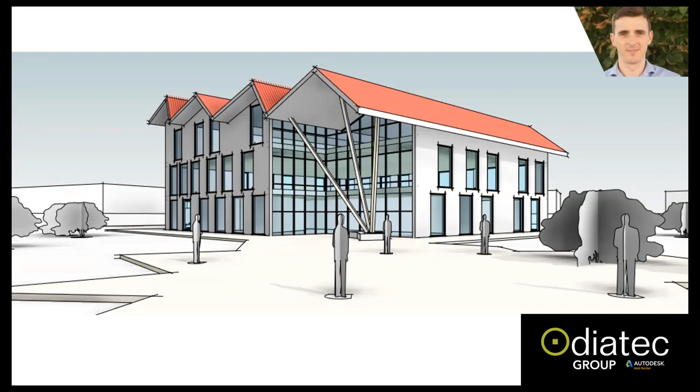But I do like to think that the benefits of using Revit perhaps alongside your AutoCAD workflow or in replacement of your AutoCAD workflow are far more beneficial, purely because you can pull things like conceptual 3D views like we're looking at here, as well as producing your 2D drawings. And I'm going to show you how to produce something like that in this webinar today.

So there are also other pieces of software such as FormIt Pro, which I will cover. That's another architectural software produced by Autodesk, and it's kind of a mass modeling, conceptual modeling design tool that you're able to use alongside Revit as well. So I'll show you some of the benefits of working in that as well.

So just a bit of an agenda. I'm going to cover some of the Revit 2022 latest updates from the product. I'm going to do an introduction to FormIt Pro and an overview, and then I'm going to show you the workflow from FormIt Pro into Revit, and then for producing your first design model or first set of drawings within Revit as well. I'll show you how to get started. This should take just under an hour.

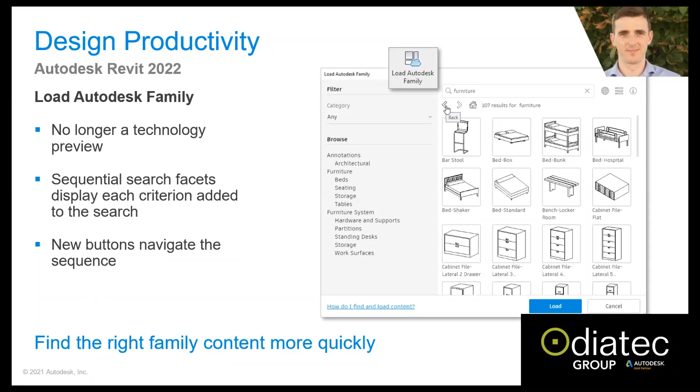So just some of the updates in Revit 2022, just some of the libraries that you're able to load in, and this is relevant even if you haven't used Revit. They've improved the user interface of being able to import what are known as family objects, and these are your 3D objects such as windows, doors, furniture. Anything like that is now accessible through a more user-friendly interface where you can just load it in quite easily within your Revit environment. So they've improved that. You're able to do native 2D PDF export.

So that was very much welcomed to this edition, whereas you didn't have that previously, but you're able to do it a lot easier now. And I know in AutoCAD we've been able to do that for quite a long time. So quite a welcomed update there.

Other workflows such as 3D sketching and sending to Revit with FormIt Pro. I'm going to show you similar workflows to that today from working in FormIt and getting your information into Revit and sending your FormIt geometry into Revit, and you're able to preserve things like your materials and your layers.

And I suppose the benefit of that is that you're producing that 3D model initially, and then you don't need to make any changes necessarily to it in Revit. You can just convert it into smart objects such as walls, windows, doors, and that type of thing as well. And you can also control your FormIt layers within Revit.

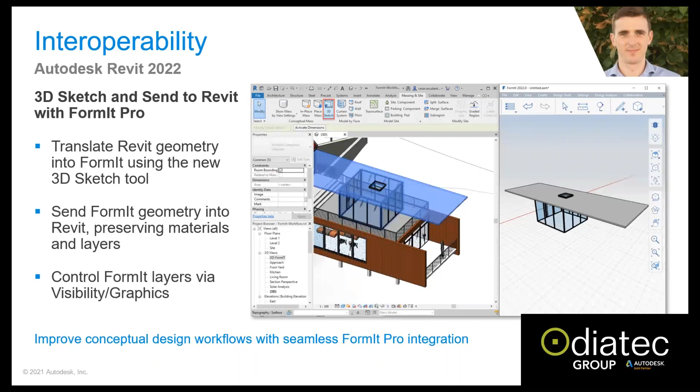And keep in mind that they are two separate pieces of software, not to confuse you. FormIt is separate, Revit is separate. You can use them completely apart from each other, or you can integrate them along your design workflows. For those of you interested from the interoperability point of view, you're able to import FormIt models as a CAD format into Revit.

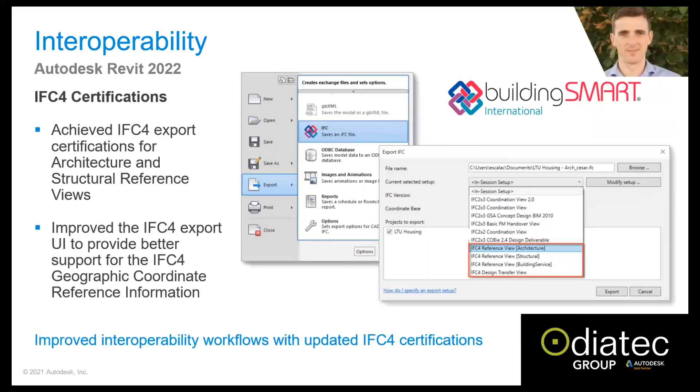Again, much welcomed. If you're working on larger scale or more complex projects, such as in IFC format, which is a neutral, recognized global format for BIM models, Revit 2022 is now IFC4 certified as well, if you're working on that type of project.

If you use Revit alongside Inventor, you can link Inventor assemblies into your Revit models as well. So that's much welcome for people maybe working alongside fabrication companies or manufacturing companies that are using Inventor. Or you can download objects from Inventor file formats such as furniture, light fittings, that type of thing, and then bring it into FormIt as well.

There's also improved things like document efficiency. I won't hang around on this too much because I will show this example in the demonstration. But you can apply something called multi-category tags for all taggable categories. That's now in the Revit 22 version.

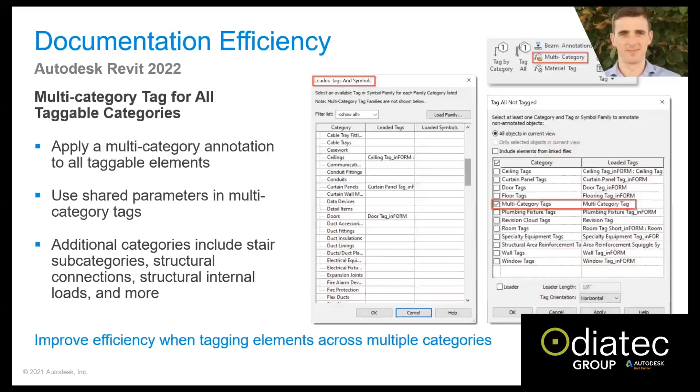Revision numbering and flexibility enhancements. If you're working to ISO 19650 or your particular standard requirements, you can now customize this to add a prefix or suffix to denote a project stage. And this is relevant to things like a BIM framework project, such as UK government type projects that require ISO 19650.

These are typically on larger projects, but it's good to keep in mind that the BIM standard out there is ISO 19650 for transitioning files or sharing files with other stakeholders. On the smaller size projects, you don't necessarily need to worry about that if you're not collaborating with other designers or other stakeholders.

Within Revit, you can apply something called phases. In 2022, you can now view these phases in view filters. It may not make sense if you don't use Revit. However, just keep in mind that phases is extremely beneficial.

So if you have existing buildings, walls or construction on site, you can apply the existing phase to them, and then you can separate the other walls by calling them new construction, and you can visually filter through each of those different ones, and I'll show you some of that in the demonstration as well.

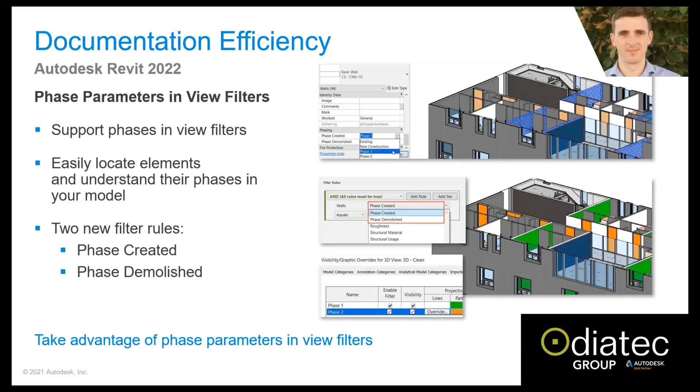Applying things like color fills, you could always do this in Revit, but they've improved the different color tones, and these are auto-generated for things like room tags. If you're placing rooms in a project, it will automatically color every different room name a different color. So if you've two rooms named bathroom, they'll both be the same color.

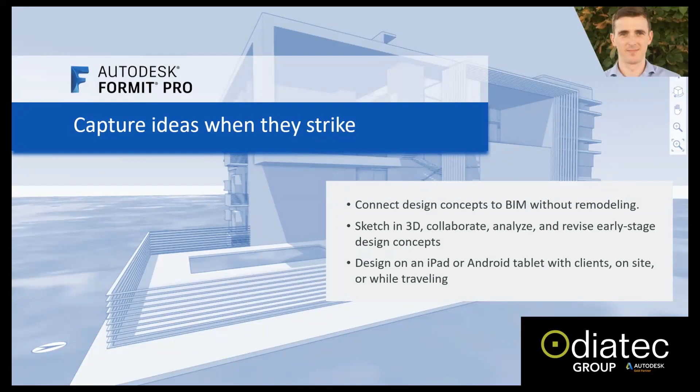And the other software I'm talking about is Autodesk FormIt Pro. This allows you to capture ideas when they strike. Essentially, it's a mass modeling tool, but it can be used on a tablet device, such as an iPad or an Android. The best thing is that you're able to then import that information into Revit once you come to that more detailed design stage.

So that's some of the workflow I will look at today, looking at FormIt Pro and looking at Revit alongside that as well.

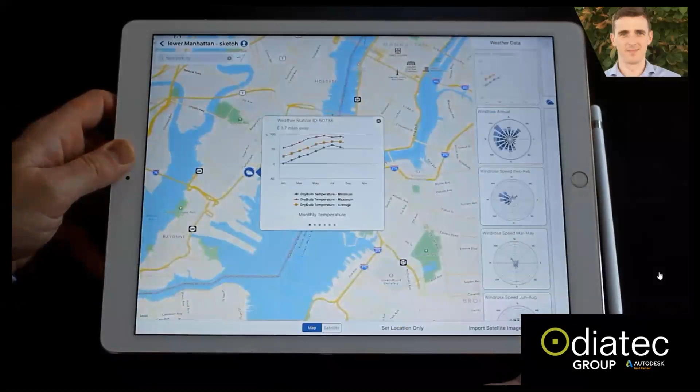So just to show you briefly, this is what FormIt is. FormIt allows you to work on an iPad, a desktop, or in a web browser. In fact, you can perform early stage energy analysis, though I'll caveat that it's probably aimed at the conceptual stage.

But you can geolocate your model and pull in fairly accurate shadow and solar analysis, such as solar radiation on a facade or on a particular roof, or if you need to place solar panels, you'll know the best area to get the highest amount of solar radiation.

So you can mass model using a stylus pen just by sketching on your iPad, or a mouse, or some sort of tablet device for your desktop or laptop. Then you simply extrude up the various geometries. There are other similar software out there, but this is Autodesk's solution to conceptual and design modeling at the early stages.

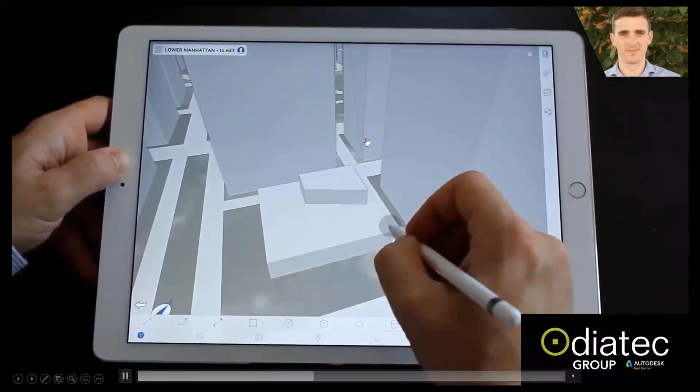So you can add solar radiation analysis - you simply highlight it and go to analyze. It will pull in the location for that building where you've geolocated it, and actually tell you the different times of the year where you're going to get solar radiation. So you know if you need to add sun shading, a brise-soleil, reduce or increase your glazing, or where to place your solar panels.

So the first thing I'm going to do is jump into Revit first, as that's the main software we're here for today, and then we'll jump into FormIt as well. I want to explain Revit to those who may not be familiar, though I'll take it you've perhaps seen it to some extent in recent years. Revit has a very similar user interface if you've used AutoCAD.

It's got a ribbon toolbar across the top here. On the left here is something called your project browser, where all your sheets and different views sit - essentially your different viewports and layouts if you're thinking of it from an AutoCAD perspective. You've also got something called your properties tab.

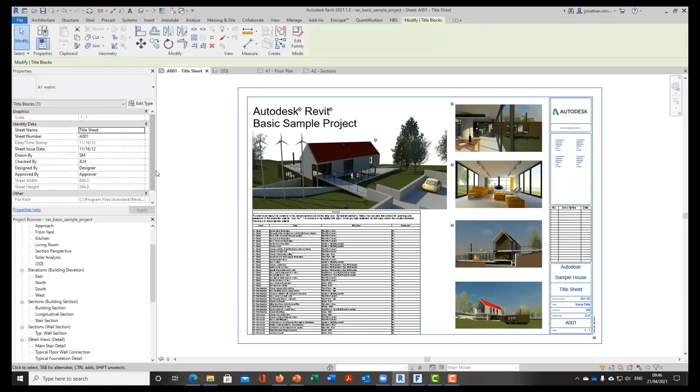So if I select an object, for example, the properties will come up here on the left hand side. If I select this title sheet, all the properties come up on the left. The same goes if I jump into a 3D view - I can select this roof, and all the properties appear here on the left, meaning finishes, area, volume, thickness of the roof, and you can even add custom parameters to this.

I can even put in here a zinc finish, and I'll show you the benefit of that in a moment. I can apply a zinc finish to this, and it's just making a note in the comments tab. I'm able to then schedule that out into a tabular form using Revit schedules. So just to understand how your 3D object relates to your properties on the left, also known as parameters, keep that in mind.

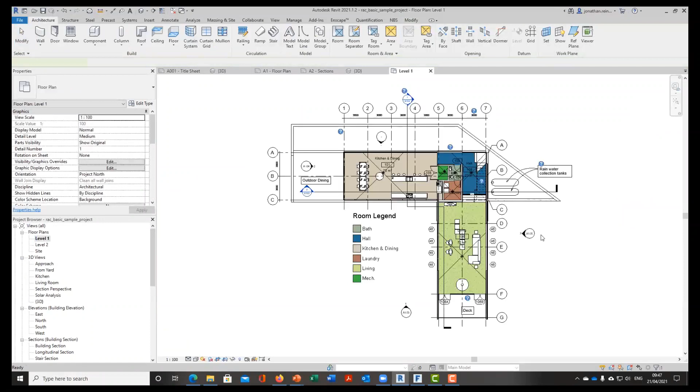So as a result of working in a 3D workflow - and this is just the Autodesk example that comes installed with Revit - it also produces your 2D floor plans, and within your 2D floor plans, all of this is interlinked to your 3D information as well.

So for example, if I select this table, and go back to my 3D view, I can see that it's actually highlighted here. If I delete this table and go back into my floor plan view, that table has been deleted. The same goes for windows, doors, any type of 3D information you model will be edited regardless of what view you change it in. There are a couple of caveats in terms of what's view specific and what's not, but generally speaking, if you model something in 3D, it appears in 2D and vice versa.

So this is just the Autodesk example of a fairly small enough project, a residential house.

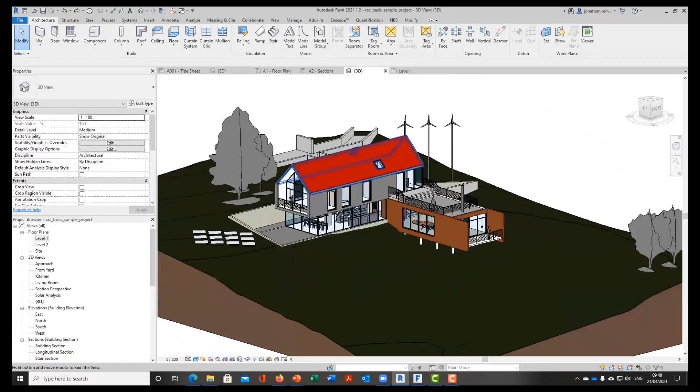I have seen and used Revit myself for home extensions, and I find it extremely beneficial, even for existing buildings. A one-off house, as we can see here, has all of the 3D content, and all of this content can be placed on drawing sheets similar to AutoCAD, but it can also be scheduled out, for quantification, floor areas, floor finishes, wall build-ups, and that sort of thing. We can get more concerned about that at the detailed design stage.

I want today just to look at using Revit as a design tool initially, and then look at progressing onto your more detailed design stage, which Revit lends itself quite well to.

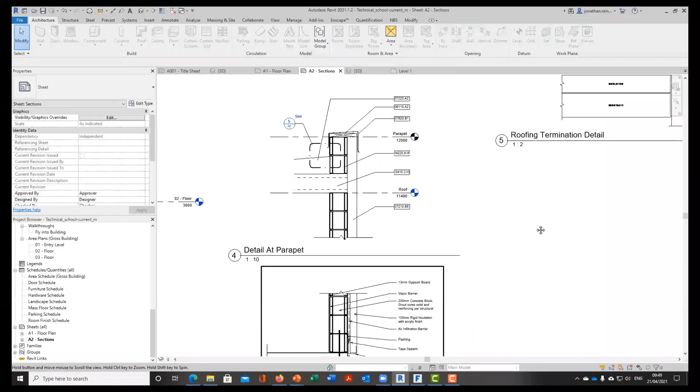What I will say about detailing, most of it is better done in the 2D environment within Revit, purely because you're not going to model every single rebar and bolt and screw necessarily in a particular 3D view, because then you'll just be there for a long time modeling it. That's kind of the thing with Revit - getting that balance between what you'll 2D draw and what you'll 3D model.

That will vary per project, but you'll learn your workflow as you go. A rule I like to work to is: model your complete wall thickness inside Revit, your roofs, all of your primary elements should be modeled within a 3D environment, even down to furniture placement, floor finishes, windows, doors - all of that key information. Then start to look at, okay, at construction stage, what am I actually going to 2D model? That's quite a fine balance to get within Revit.

It's very easily achieved as well, because within Revit, just modeling in 3D, everything comes together very, very fast paced, I have to say. I'll show you some examples of that as well.

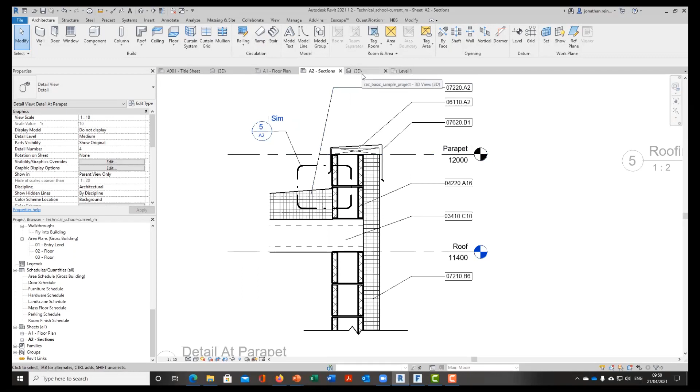I just want to show you another example of a project I have here, just to show you that Revit is for larger projects as well. If you're working on larger commercial or mixed use projects, Revit is extremely relevant for that type of project as well.

Your workflows will vary if you're collaborating with other consultants, whereas if you're just modeling a one-off house and looking to use Revit as a design tool for drawing production, it's a slightly different workflow. In fact, it's probably a bit easier for somebody not collaborating on a project, just in terms of time saving for that particular size of project, such as a one-off house.

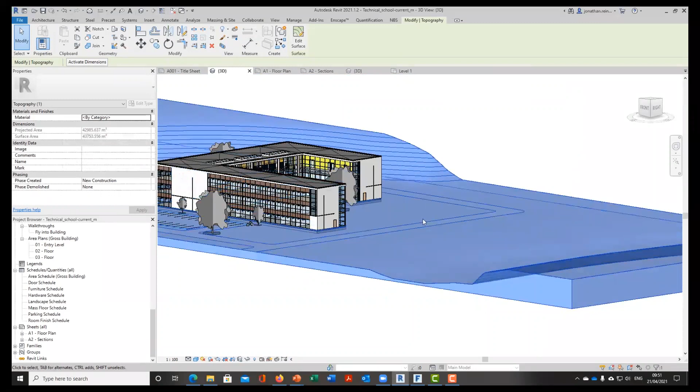You can still bring in 2D information entirely, that's no problem whatsoever. You can still link in AutoCAD drawings as well, and I'll show you some examples of that. So here again we have a bigger 3D model. We have the complete land topography modeled. I can see the area of that, the surface area of it, and again I can select any of these objects, even these trees, for example, to see what information they contain.

If it's some sort of planting that we're trying to apply to the site, we can also schedule out this type of planting as well, if it's proposed landscaping, for example.

So that's looking at two different Revit projects. You can start a number of ways inside a project, and I suppose the initial way I like to start is in a Revit template. So I just go to New, then go to Project. I'm just going to drop down, and these default templates come installed with Revit themselves. I always like to start with the architectural template.

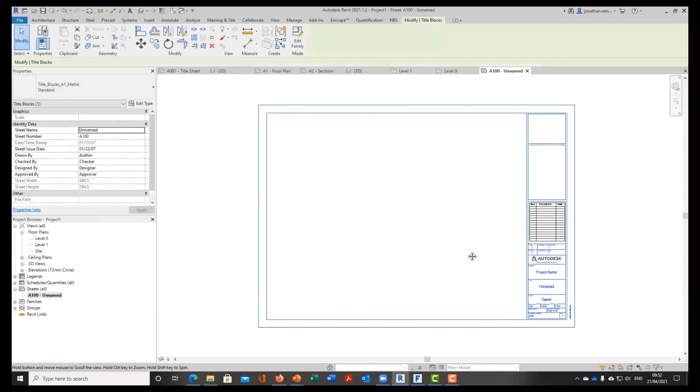The thing with a template is you will end up actually producing your own for your own company. So in a template, things like your drawing sheets are automatic. You can, of course, place in your own data here. You can completely edit this title block to your own specification that suits your business, for example.

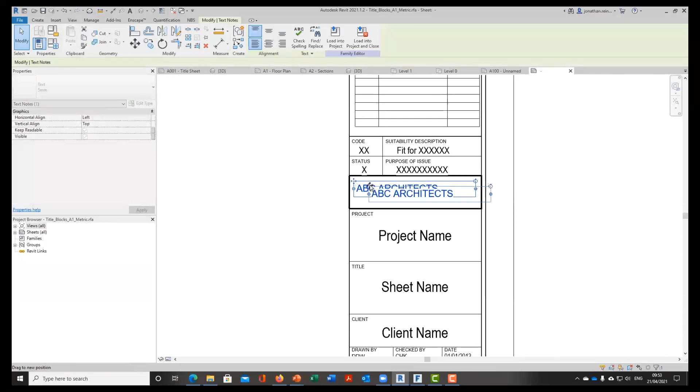You may want to delete some of these lines and make it your own. We can take out this logo and put in your own logo instead. For example, we can insert an image, or type in our company name, like ABC Architects. You can completely change the text and its formatting, and if you have an image for your logo, you can import that too.

Title blocks are contained in something known as a Revit family. A Revit family is comparable to a CAD block in that it's not a full Revit file - it's a partial family file that you import into your Revit project, such as doors and windows, which are also family objects. I'll explain that in more detail as we get into modeling.

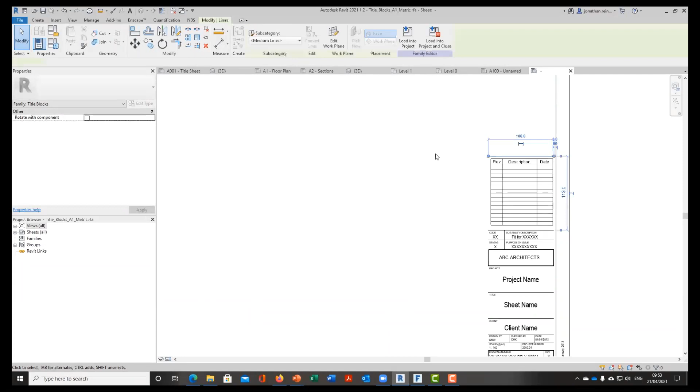You can customize this - I can move all these objects around, create a complete portrait version, an A1, A0, whatever suits your business. I can even customize the colors, all that kind of stuff. Very similar to AutoCAD, you can completely import your title blocks, no problem. So I'm just going to re-import this into project one, the one I've started.

I've started in a blank project here, so there's absolutely nothing in it. I'm going to close the other projects in the background - I'll close those examples I had open, and I only want this particular Revit project open. Now I'm going to start modeling in Revit.

The main thing to understand before you start modeling in Revit is levels. Whenever you model something, it will always be constrained by a level - it will always sit on a level. When you think about it, when something is constructed on site, it's always constrained to a level, whether that's ground floor, first floor, fifth floor, 10th floor, etc.

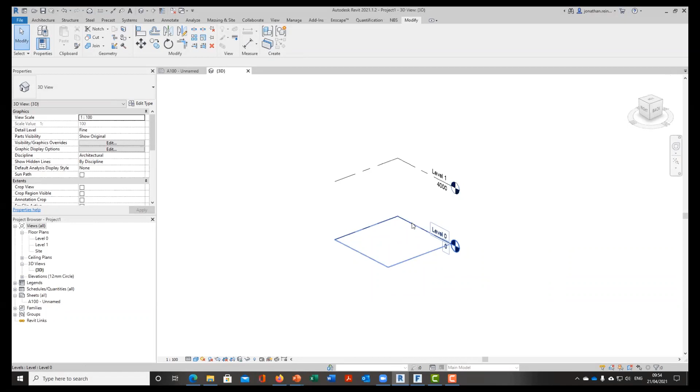An object such as a chair is going to reside on a floor, so floor levels are what are known as host levels. When you set up your levels - levels are set up by default in a Revit project, but you can also set up your own Revit levels.

If I can remember, I usually use keyboard shortcuts - view... here we are, insert, annotate... okay, so I can't even find levels. Well, I use keyboard shortcuts, that is why. I type in LL for level in an elevation view. I can also duplicate these up if I want. So in an elevation view, to create a level, just hit LL.

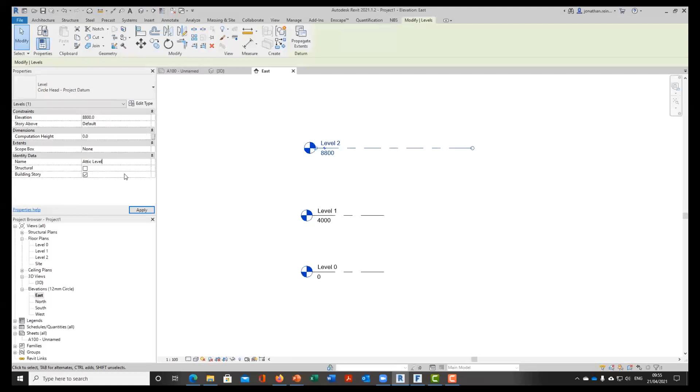I want to create another level, so I could call this my attic level, for example. It's a good idea to create your levels initially before you start your project and before you start modeling in your project necessarily.

You can move these levels throughout your design process, no problem. Just keep in mind, if something is constrained to a level, it will move with it. I suppose that's the intelligence of using a BIM type of software - you're able to move levels and your objects will move with them as well. That in itself brings some efficiencies.

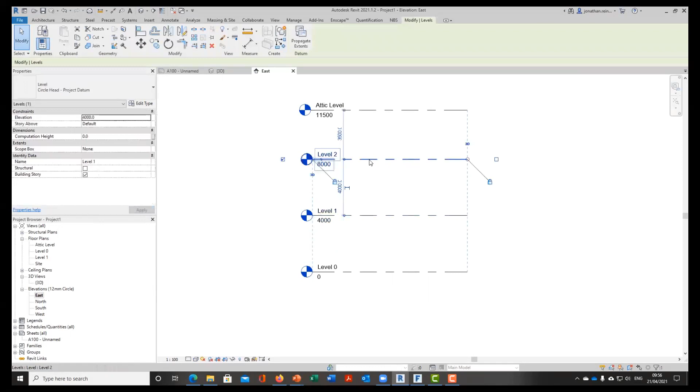I'm going to create another level here - let's create a 3-story building. I'm just going to call that level 2, and I can rename it. So we're in an elevation view here in our project browser on the left hand side, and we've got a series of levels created: level 1, level 0, perfect. And we've got an attic level as well.

You don't necessarily have to create a ridge or roof level. I like to just create my principal levels, the levels I'll be modeling onto. For example, on the left hand side here, I've got floor plans - attic level, level 0, level 1 - and I've got a site level, which will obviously be your site view above your roof.

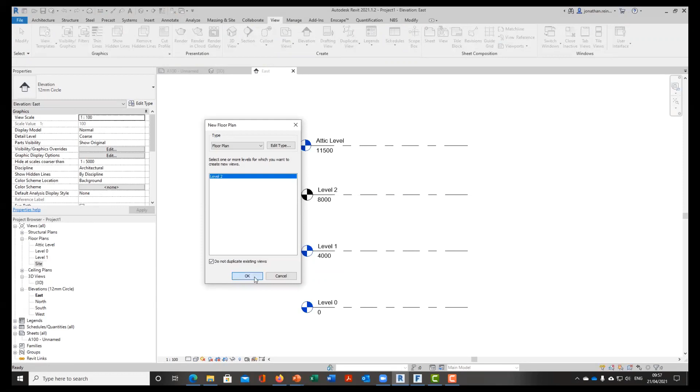I can create further views - whenever you create a level, you can also create a plan view. If you go into plan view, just go to floor plan, and it will allow me to create a level. All the other levels already have floor plans, so it's only allowing me to create a floor plan for the level that I haven't placed on a floor plan yet.

Click OK on that. So we've got level 0, level 1 and level 2. So if I close all of that, I'm now going to open my default 3D view. So you'll see up here there's a small default 3D view tab. So I'm going to open that up and I'm going to show you just on the right hand side, we're in a 3D environment, and if you type in WT, it brings you tile windows. So that means your two tabs are side by side.

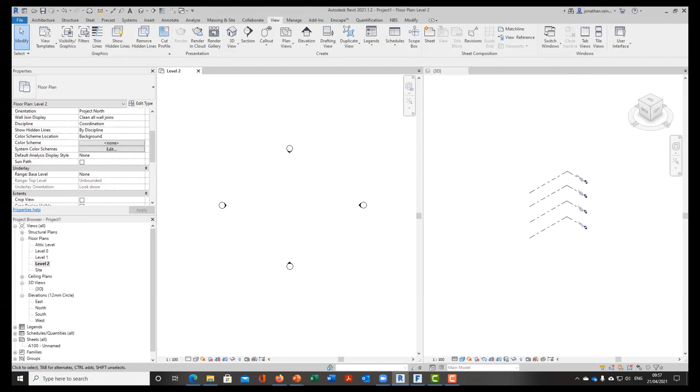So we've got our 3D tab, we've got our 2D tab within the same project, or you can just hit tile views as well. That's the same way of doing it. So we've got our 2D view over here. The first thing I always start with is modeling walls. We can put in floors afterwards. So I like to just model some walls. So I just hit my wall tool.

On my left hand side, it by default selects a particular wall here. So these are all pre-installed walls. You can delete all of these walls if you want. I usually just overwrite them with my own particular wall. So at design stage, I like to just create a blank wall. So I duplicate this wall. I'm just going to call it a 450mm wall. We can add in detail afterwards.

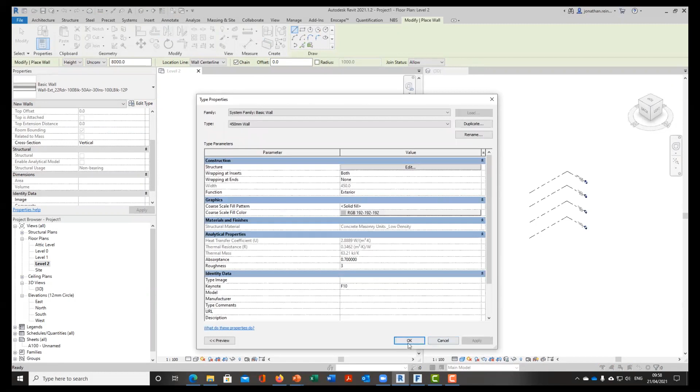So edit. I'm going to delete absolutely everything in this wall. And I know I'm moving quite fast here, but I just want to show you how quick it is to get a wall drawn up or placed within Revit as well. So I'm very simply just going to start dragging my wall. I can type in the different dimensions here if I want as well. So I can put in 5,000, it gives me a 5-meter wall. And you can see on the right hand side, all of that information is also being generated up there.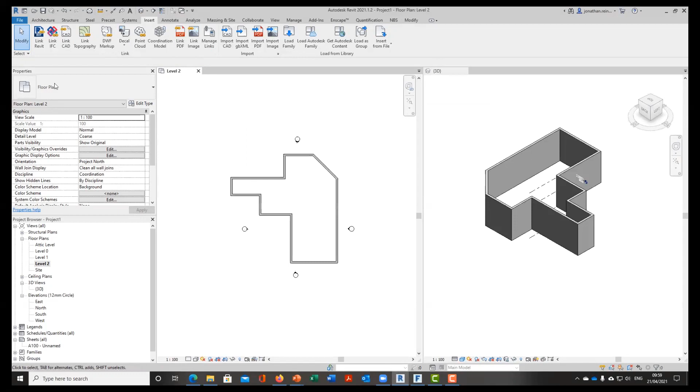We'll put in the slanted wall as well. Pull that down. So what you could have done here is in fact imported your boundary drawing from a 2D CAD plan, and I will show you how to do that in a moment. So let's say that you have a CAD floor plan created, or even a topography taken in from a surveyor's drawing. You can in fact link that in as well. So I have one on my desktop, drawing 1, colors, I'll just set that to black and white, auto detect. That's fine. I want to place this at level 0. Just going to hit OK on that.

So you can see here on the left hand side, I'm actually modeling in level 2. So if I go into my 3D view, everything is modeling at level 2. So you can see that that's actually imported at a larger scale. So that could be your site boundary, but it was actually supposed to be a floor plan of a building that I generated initially. So I'll just X that.

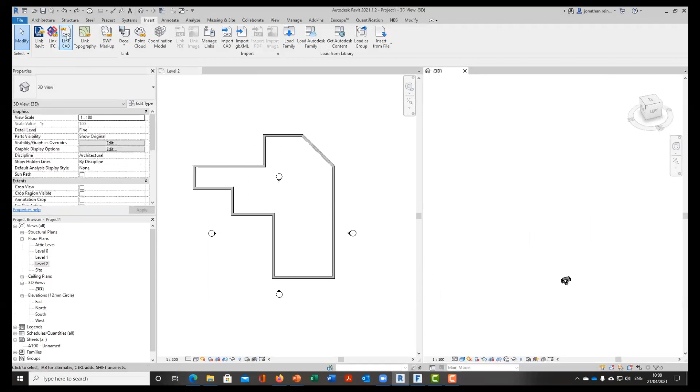So what I'm going to do again is manage, insert, link CAD, and hit drawing 1. And I'm going to set that to millimeters, place it at level 0, click OK, and you can see it has actually come in there. So I'm going to pull that off to the side. So I can actually start modeling over this within level 0 now if I want. So here is our CAD plan. I can start now modeling over this. So I like to pin it in place. That means you can't move it or drag it.

It's in its place. And these 4 arrows are actually your elevation markers. So I can actually move these, and these are just the directions that your elevation will face. So my elevation is going to be within there. Pull that one over there. And these are just related to my elevation views, my east, north, south and west over here. So as I move these, this information is actually being updated as well in the background. So if you move an elevation line, your elevation drawing updates as well. So that's obviously quite beneficial.

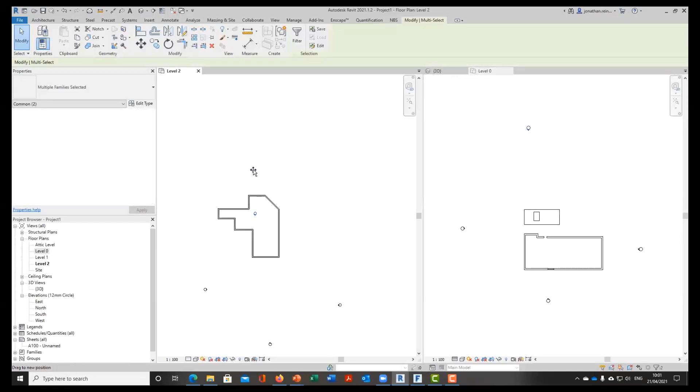Now, the reason we're not seeing this in this particular floor plan is because it's modeled at level 2 and we're in level 0. So what I'm going to do, I'm going again to move that. I'm going to select all of these walls.

I'm going to place the base constraint as level 0. I'm going to make my top constraint attic level. I'm just going to hit apply, and you can see that now comes in there. So what that's done is the base constraint has been set to level 0, so it starts at level 0, and the top constraint is up to attic level. So now it runs up to attic level.

If I go into my elevation view here, if I want to move my attic level, for example, if I wanted to make this 10 meters, I hit that, and you can see because all of these walls are constrained to attic level, they will all move to the 10 meters as well. So it gives you that flexibility to move everything at once. So we've got that building created there.

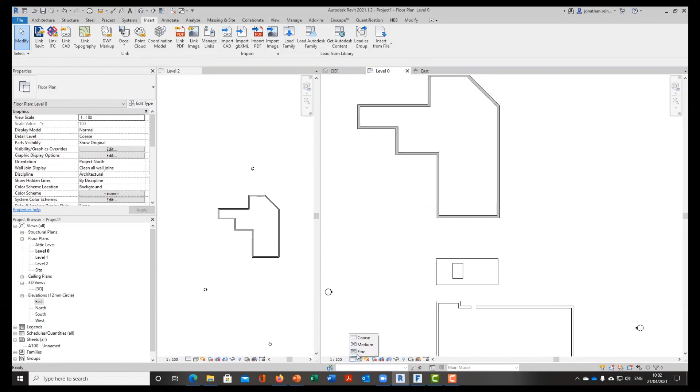So what we want to do now is the CAD plan that we've imported, we want to turn that into a building as well alongside this one. You can see here we've got the walls drawn, they've got a hatch inside them, but it's just at design stage. I'm just going to turn that off and set that to coarse. So down here, these are your view settings. It only changes it in this view. It's just a visual thing.

If I zoom in, you can see we've got a grey hatch and a black outline. I can change this in the wall build-up if I want. You may want to change everything to black, maybe you want the walls hatched black. I can go into graphics and just change that at the coarse level, and you can see it updates in level 2 as well. But that hasn't affected the fine level of detail, which we can come back to later. At design stage, you just want to create that black wall outline.

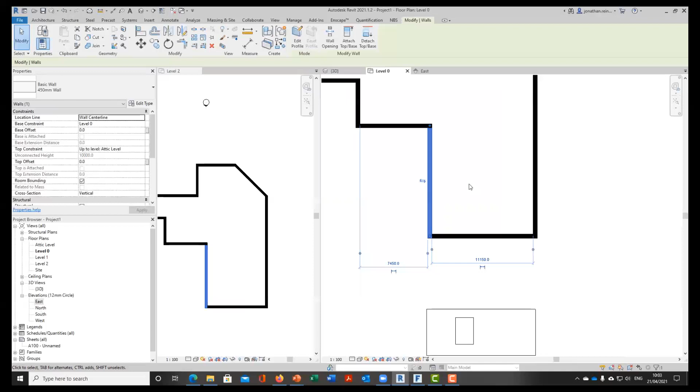So now I'm going to select all of those. They are facing the wrong way. The reason I know is because these arrows should actually be facing outwards. That just means that the wall is on the outside, which is relevant if you're adding finishes to a wall. So here we have our CAD plan. This only exists at a 2D level. You can see it in 3D there. It tells me the name of it is drawing1.dwg, and it's linked in.

I could open up AutoCAD and edit this floor plan if I wanted to. So I could close down my desktop, go into drawing 1, open up this. So very similar to how an XREF works, you can link in your particular CAD file, and this is a very common workflow when you're transitioning to Revit, and I've done this myself on numerous projects. So open up drawing 1.

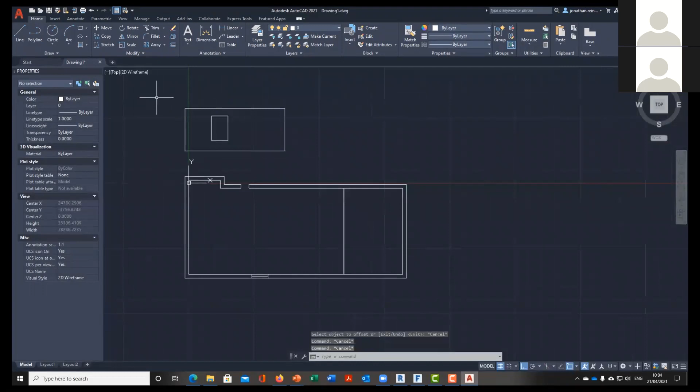I can now maybe add in some boundary walls, room bounding walls within here. So maybe I want to offset that. If you're working with 2 people in your office who are working in CAD, you can have this linked into your Revit software, and you can just refresh it every time. So I'm just going to hit Control S, save it and jump back into Revit.

All I'm going to do is go to Manage Links up here, go to CAD, and just reload this. You can see it's reloaded in there. Hit reload on that, and you can see the updated CAD plan comes in as soon as you refresh it. So that's a common workflow when you're transitioning to Revit or to BIM.

So I want to place walls over this. I'm going to go to my wall tool. I'm going to use the same 450mm wall, and I want to pick finish face exterior. So I just tabbed into that. It selects every line, but we don't want the internal lines.

So all I'm going to do is go to pick lines up here and just start placing the walls on those lines. So you can see we've got lines here, lines here, lines here, and lines here. So I am actually going to fillet this one. So you've got a trim and extend command the same way you do in AutoCAD. And obviously I'm actually modeling in the 3D environment here. And again, you can see it's being placed at level 2, which is not ideal and will happen.

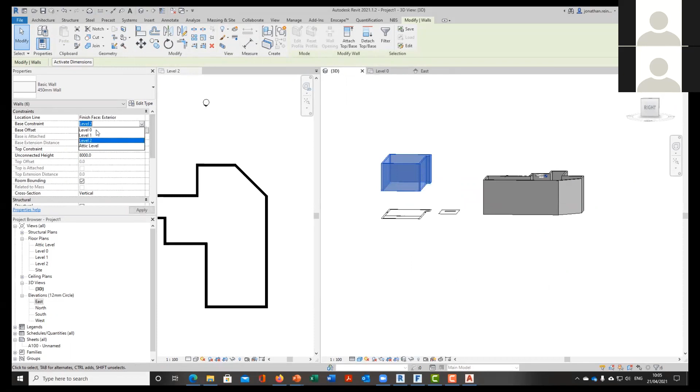All I need to do now is select level 0, and I want the top constraint to be level 1. So that'll just be a single story building sitting out there. I was able to quite easily move all of that. So I can go into my level 0. Now I want a 100mm wall in the middle of this. I will go in here into my walls, and I'm going to create a new wall because I don't have a 100mm wall created, so I'm going to duplicate this one.

And these wall build-ups will all be contained in your template. You only need to create them once really, and once you start a new project, you will then have them again. So it is going to replace this wall, but I'll show you how to change that in a moment. It did that only because I had it selected, so I'm going to undo that. And now I'm going to place this particular 100mm wall, pick lines, and let's see where that came in.

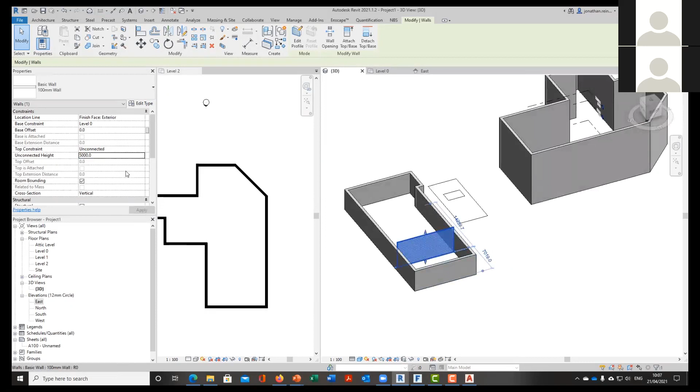So the base constraint is level 0, as I can see, but it's going up, it has an unconnected height. I can change the unconnected height so there's no top constraint whatsoever. And obviously this will happen across buildings, but it's always nice to constrain to different levels because it helps if levels change on a project. You know, the structural engineer might say we need a higher floor level, or the slab has increased, so you're able to move the levels based on that as well.

And levels, I like to base them on the finished floor level, or the finished slab level. Just keep it common across your project is the main thing. So we've got 2 buildings created nice and easily there. What I'm going to do is create a drawing sheet now just to place these onto. So I'm going to delete my CAD plan. We don't need that anymore. I can delete it, it removes it.

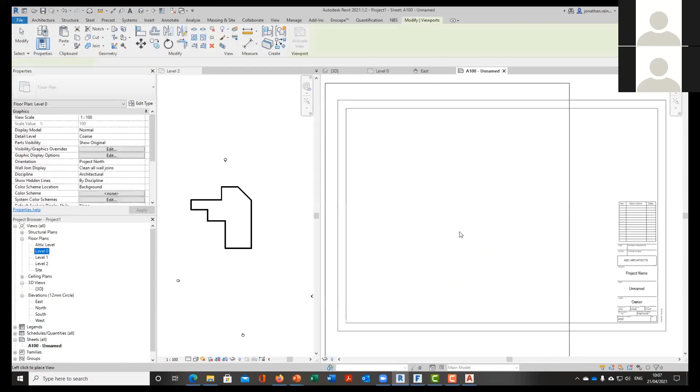And I'm just going to place these onto a sheet. I've got my scale here. I've got my sheet created here. And this is my 3D view. I want to go to my level 0. So level 0, I've got my floor plan. I want to go into my sheet, and all I'm going to do is just drag on my floor plan. I can change the scale. It's not really fitting. I can rotate it so that it fits on an A1 sheet or whatever your particular sheet is.

And I can crop this area as well. This cropping is only view specific. It doesn't affect the model whatsoever. And this should hide the elevation markers as well if you don't want them to appear. So I want the view cropped, but I want to hide the crop region. So that's how you control that.

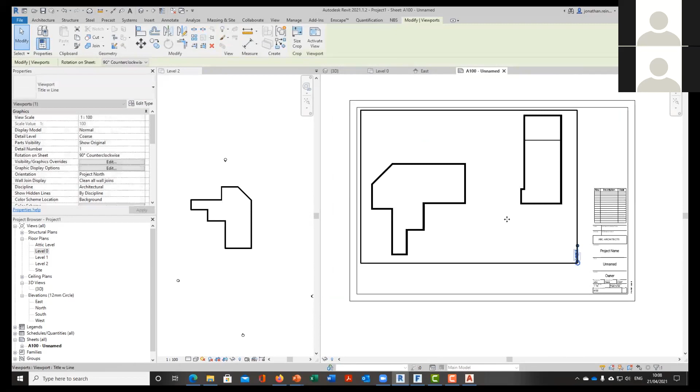Our title has been brought in here. You can turn off these titles. You can edit this title as well. You can control the text of it, the rotation of it. That's absolutely no problem. But the main thing is that it automatically brings in the name of the level and the scale. So if I change the scale to 1:50, that will automatically update. Okay, so I'm going to make this drawing look a bit tidier.

What I'm going to do is start placing windows and doors quite quickly. I'm just bringing in the window tool and placing all of these windows along here. And these are all being placed at the ground floor level. I'm doing this nice and quick just to give you an inclination. And I'm using keyboard shortcuts, so DR for door or WN for window, and you can place them quite easily along here. So we've got a floor plan created there. If I go into my 3D view, I can see it has placed all of those windows and objects as well.

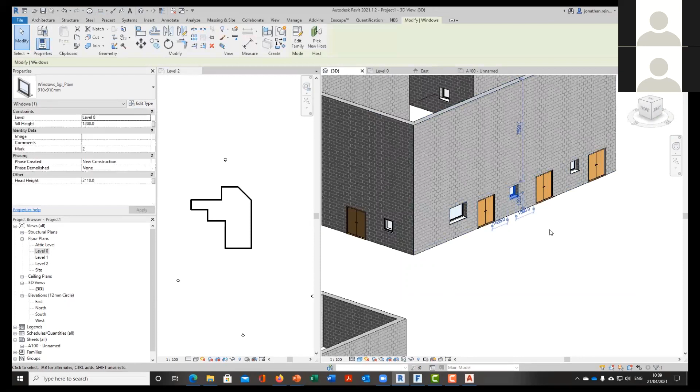In fact, what else I can do is I can change the size of these windows. So I want to edit this window. So this is where I suppose type and instance parameters are quite relevant. So if I select this window, I can drop down and change that window and it will update there. But if I want to change this window across the entire project, hit edit type.

What I'm actually going to do is I'm going to rename this one. I'm going to name it, what do I want? I want a 1.5 meter by 1.5 meter window. So I'm just going to rename it, and I'm going to change the size of it. And you can see that that has reflected across the entire project. Everywhere that window exists, that has been placed there as well.

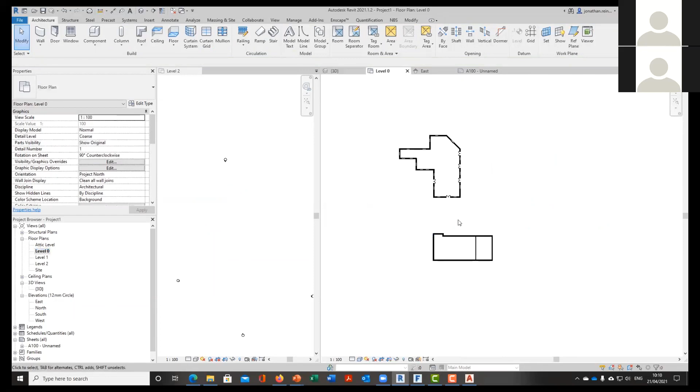So I'm going to make this a single story building just because we're a bit pressed on time. So I'm just going to reduce that down to level 1. Just keep it nice and simple for now. And we're going to go into level 0, and we're going to just start placing some internal walls within here as well. So we can place some internal walls. So I can move that across.

For example, I can do something now called room tags. So I'm going to place some room tags. So that is an object that tells me what square meter or what perimeter that room is. I'm going to place room tags, and these tags can appear in your drawings. So it tells me what square meter it is or what square foot. You can turn that off also.

And I'm going to apply a color scheme. So color scheme based on rooms, based on room name. I'm going to hit apply on that. Now it's given me 3 different rooms, all the same color. And what I'm in fact going to do is I'm going to rename these. I'm going to rename this office.

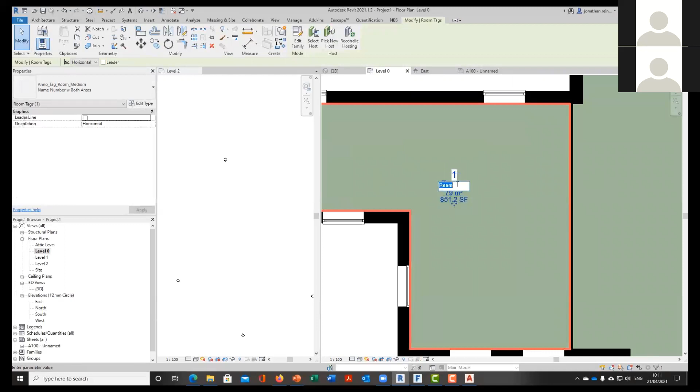I'm going to rename this one to public hall. And you can see that the color is actually updating, and I can call this bathrooms. You can see that the color has updated and they're all individual now.

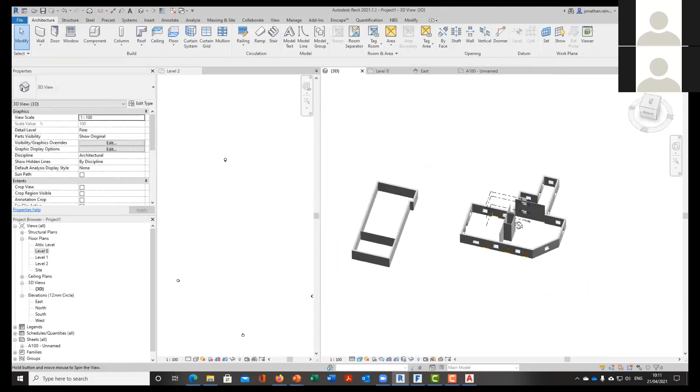So if I was to add another room, for example, and name it as something else, if I was to add some sort of internal room in here, place a room within here as well, and then place a room tag on that, it's in fact given that an individual color as well. I can call this plant room. So that's kind of building up your floor plan sheet as well as building up your 3D view as well.

So I can select all these walls and set the upper constraint to level 1. Hit apply on that. We've got our floor plan created easily enough, and I appreciate this is probably quite a simple building, but I just want to show you the principles of modeling your objects.

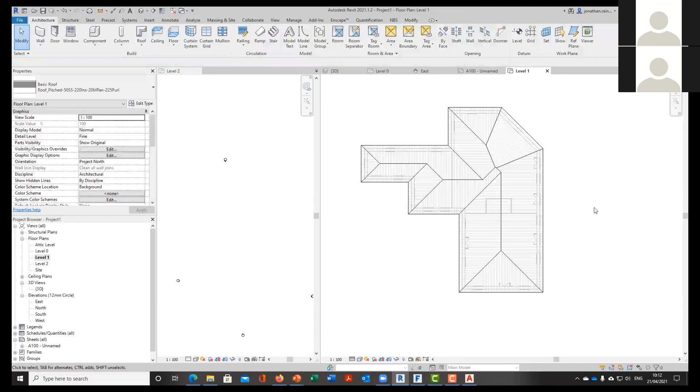I can then place a roof on this building, roof by footprint. I need to do that at level 1. I can do it at level 0 if I want as well. I'm going to do it at level 1. I'm going to select the walls. I want a 500mm overhang on my roof, and all I'm going to do here is hit tab, press roof. I want all of the roofs to be pitched, all of the planes. You can see that's generated the roof automatically.

Go in here, and our roof has been placed at level 0. I just need to change that to level 1. And we can see our roof has been placed, and we can edit this roof very, very easily. So I can go into level 1, edit footprint. I can select this. I can say, okay, I don't want that to be a pitched roof. I can turn that off. I can make this a non-pitched roof as well.

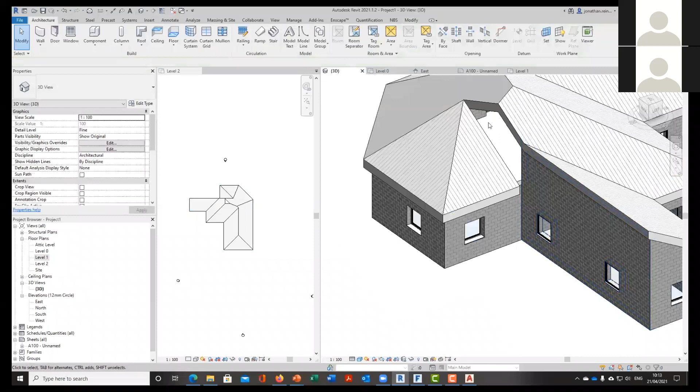Hit finish on that. Go back into my 3D view, and you can see that you've got kind of a mono pitch, and it will automatically update the mono pitch. And now I can attach these wall elements to it as well. And then we know that obviously in here we need to then edit this wall or draw a wall in here, which is also very easily done.

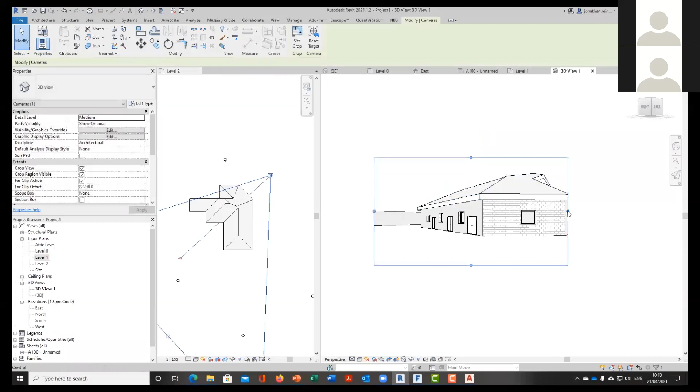So what I'm going to do now is just place a 3D view on a sheet, very simply. Go into level 0, go up to view, 3D view, camera, and pull a 3D view in here. It has created a crude enough 3D view, but you can edit these visual graphics. So I'm going to go to GD, graphic display.

I like to smooth lines, turn on my shadows, and I like to turn on my background to a gradient. Hit apply on that. I like to make my ground level white, so it disappears in the background. And there are lots of different view settings I can mess around with here. I can even add different materials.

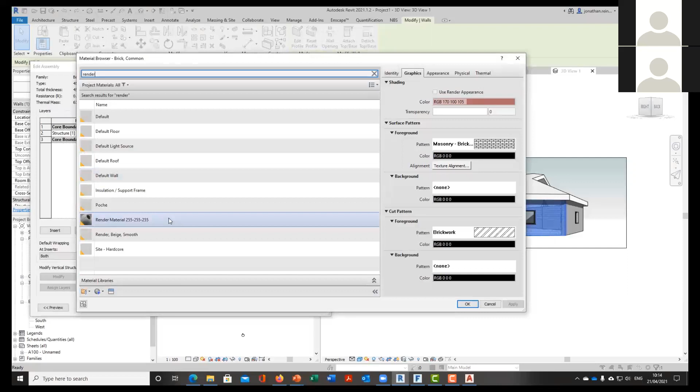So what do we got here? Brick. We can change it to brick if we want. Just see if I have a render finish in here. Default. We've got a render beige smooth. So I can update that in that wall. So that's just changing the wall build-up. And you can see that's edited that and placed the new material on wherever that particular wall applies.

So we've got a fairly, not the best looking architectural building. We can change the sills of these windows, by the way, as well. Just hit apply on that, change the sills. So I can now place that 3D view onto a sheet, 3D view 1. So I can place that onto a sheet. So you can definitely add more architectural elements to your building as well.

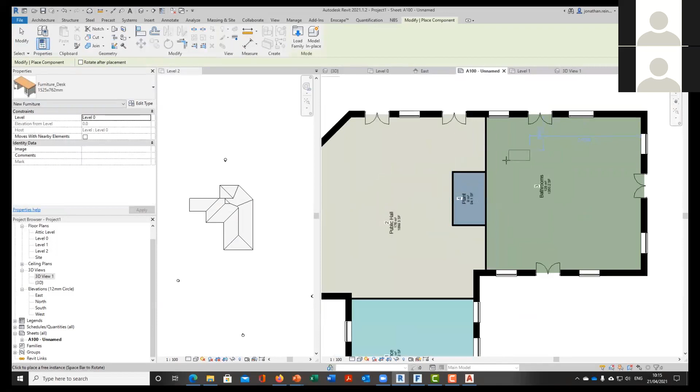In fact, what I can also do is start placing trees and stuff like that around. So CM for component. Oh, I've got some desks. Let's place some desks in here as well. Let's assume this is an office. You can place these, obviously, dimension-wise, no problem at all. So let's place that one there. We've no doors into any of these rooms, so place some doors there.

So now I can start placing some trees just to give it a bit of a prettier look. I've got some trees loaded in here on the left hand side, or you can load in trees from your library. There's a complete library in here of walls, windows, doors, landscaping, furniture, absolutely everything. So I've got some trees on the left hand side, I'm just going to start placing these.

You can see they're actually coming in the 3D view as well, so you can start to architecturally improve your drawing, and you're in a lot of control of changing the graphics as well. We've got this building off to the side here that doesn't really make sense for now. So we've got our 3D view, we've got these created. So that's basically how to start modeling in a Revit project.

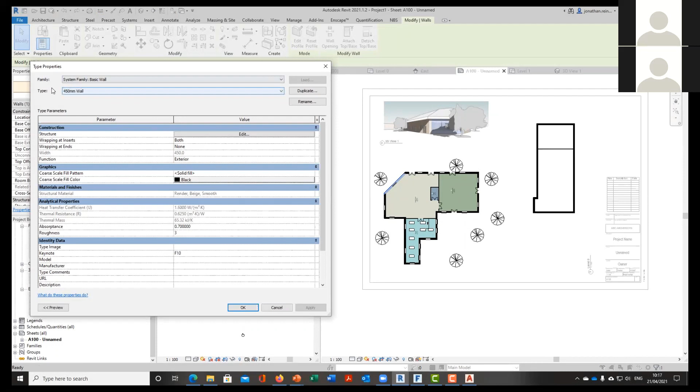Keep in mind level constraints and different types of parameters, such as instance parameters. An instance parameter exists in here and will only apply to this particular wall. If I go to edit type, that will change the type parameter, and wherever the 450 wall appears, it will change it in the entire project. So you've got instance parameters, which are only that particular single instance, or type parameters, which will reflect across the entire project wherever this 450mm wall appears.

So now I'm going to create a quick room schedule. New schedule. What I'm going to do here is create a room schedule. So rooms, click OK. I want the area, the name, and the level of the room. Click OK on that. That has given me a fairly basic room schedule. I can now go into this, and that's an accurate real-time room schedule.

I can drag this onto my sheet if I want. I can rename it so it's a bit more intelligently named as well. But that's essentially getting started, and schedules work the same way for checking quantities of doors, for example.

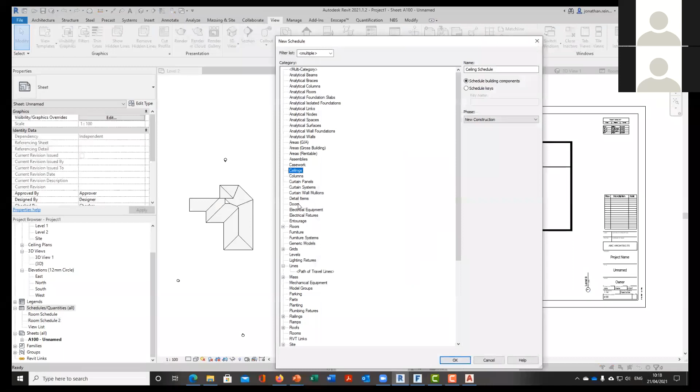I could create a door schedule in here if I wanted. If I just go to doors, D for doors, I want to create a door schedule. I want the finish of the door, and something called the type of door. So type and finish of the door. Click OK on that, and that's going to give me a complete list of the doors.

So the finish has not been added to the particular doors, that's absolutely fine. I can also bring in the family, so the family of door, which tells me what the category of that door is. Is it doors, external, double flush? You can create your own families.

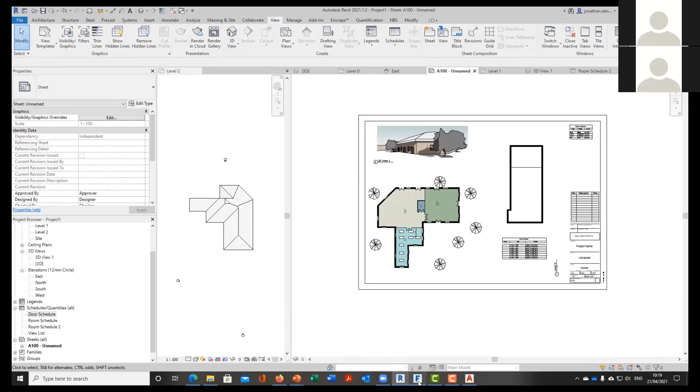Again, I can place all of this door schedule information onto a particular project. I appreciate this project is probably quite basic, but I just wanted to explain the principles of getting started in a Revit project and how customizable you can actually make it. So that's a quick overview of Revit.

What I want to show you now is if you were to start this project in FormIt, for example. So here we have FormIt. What I'm going to do is geolocate my site, picking a site down here in Tralee where I'm based, and import my satellite image. Let's say it's a greenfield site being imported there.

So that's brought that in, and if I go into my layers, it's actually brought in an indication of the terrain. This is fairly accurate to a degree - I wouldn't go constructing off it, but generally it's fairly accurate in terms of the fall of the land moving a certain direction. So what I could do here, if I wanted, was start to model my building. I'm just going to change my settings to millimeters.

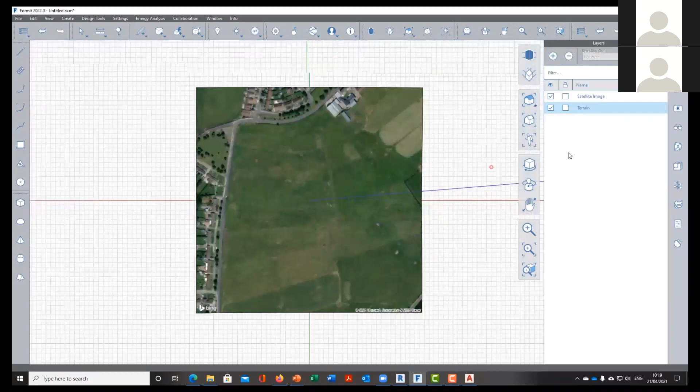Keep in mind this is a completely separate workflow to Revit, but you can cross them over. I'm going to model a different type of building here, keeping it fairly simple. So what I'm going to do is pull up a tower building. I can start to add in more detail into this if I really want.

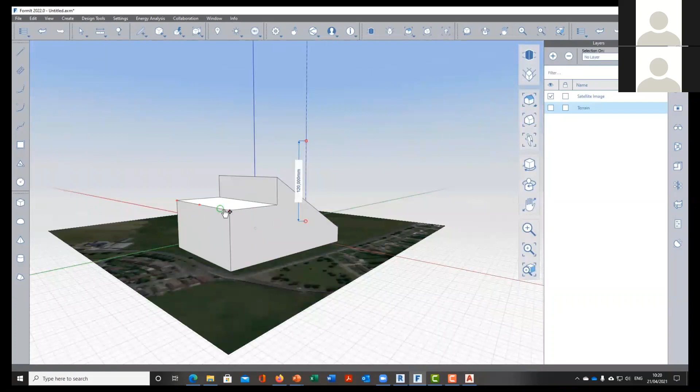I can even start to extrude that down, move this out if I want. Probably a bit overpowering of a building for the context - let's completely pull it down and be respectful of the neighbors. So I'm going to pull this down so we're not overpowering the neighbors. We want a nice community building that looks after everyone, so we've got a school or community building being constructed there.

You can add a lot more detail, add on different blocks. What I can do with this now is import it into Revit. So what I'm going to do is export it - I was going to save it on my desktop, export - yes, I want to replace that.

Now I'm going to go into Revit, and into my 3D environment, into this one, go to add-ins, then import FormIt to Revit, desktop. There we go, hit open on that. And that has imported that object into my 3D environment.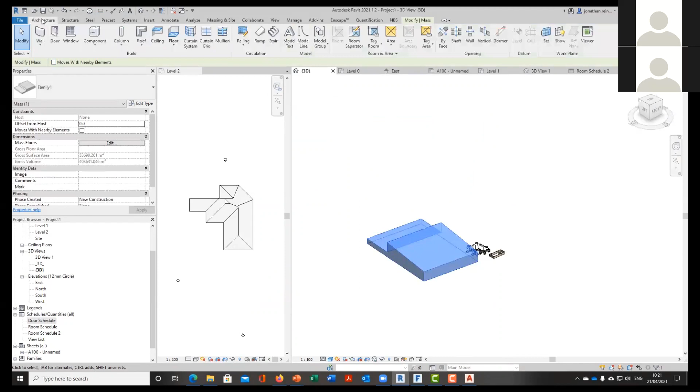So I can now convert this to new objects if I want. Under architecture, I can go wall by face and select my 450mm wall, and start to select my walls - this is actually adding in the walls, replacing the massing that I just created within FormIt. I could delete that or turn it off. Select that, and we've got our walls created from our FormIt model alongside our other project as well.

And then we can start adding in our window objects as well. Obviously we want quite bigger objects - let's say they're really big 3.5 meter windows. So I'm just going to call this 3.5 meter and apply, hit OK on that.

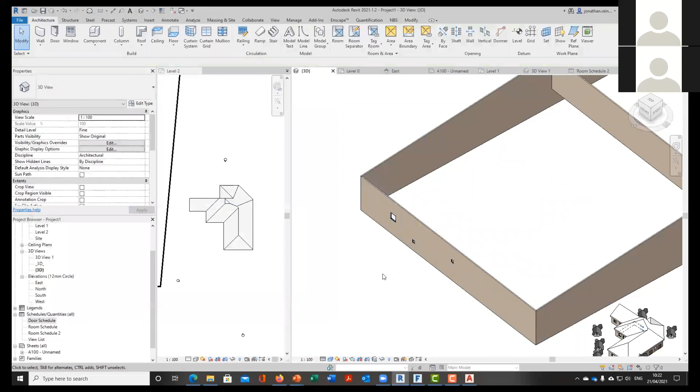I want to create a couple more of these around. You can start placing your windows along. I can completely control this - I could select all of these, change the sill level, say you want the sill level to 500 at ground floor level, hit apply, and just change the level to level 0, simple.

And I can in fact duplicate these up as well, simply duplicate them up to my next level, putting that on level 1. Sill height, let's make it 500. Now we need to go a bit higher, our floor levels are a little off to our windows. And you can keep duplicating and building up your building in that capacity as well.

So I should probably place a roof on this. So for the roof, I just want to put a mono pitch.

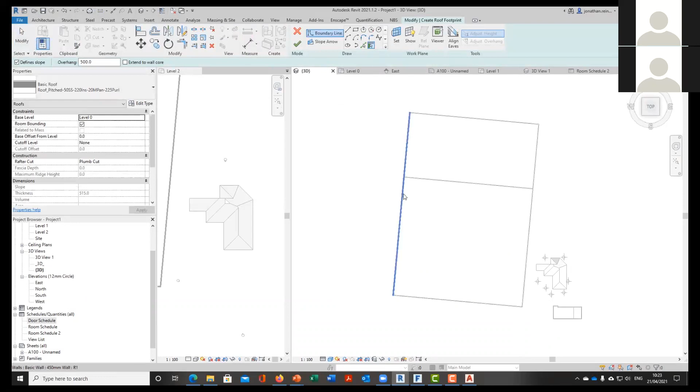So what I'll do is just create my roof. I'll select my walls - I don't want an overhang, I just want it to be a flush roof. So I'm just going to select all of my walls.

Select those 4 walls, hit define slope, because I'm going to turn it off and I want this one to define the slope. Hit apply. I'll hit attach, because when you hit attach, it tidies up - oh, it's gone to the wrong level.

That's what's happened there - we've gone from level 0, let's go from level 2. Apply. I can in fact change the pitch of that, if I only want a 5-degree roof. 5 degree, let's go from attic level.

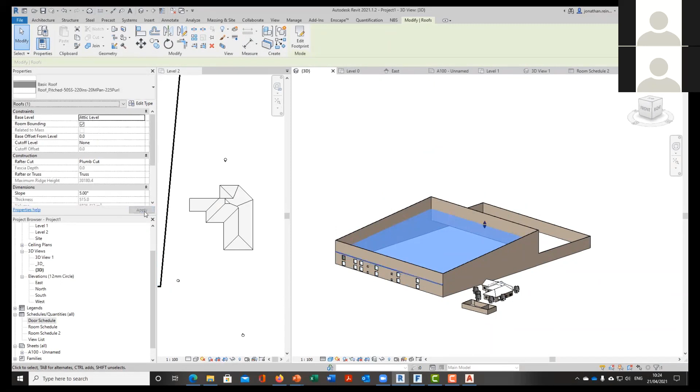The reason for that is this wall is 20 meters high and this roof is not at 20 meters high. So I can go to level 0, change that to 20 meters, and apply on that.

And you can see we've got a nice tidy roof created on our large community building that you can start to add more detail, very similar to this as well. So that's taking something from FormIt.

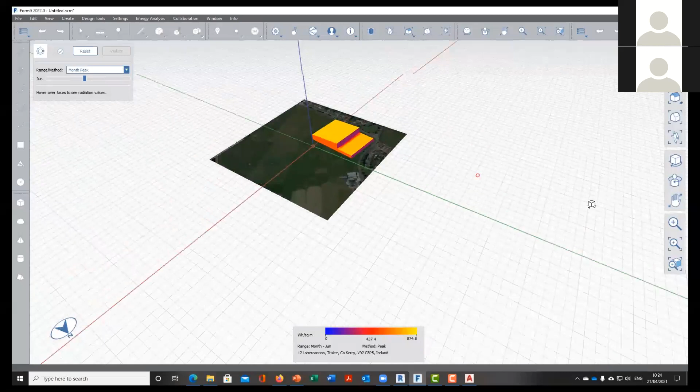You can do a lot more in FormIt, as I said, such as the solar analysis. It takes a second, just pulls in local weather information, hit analyze on that, and you can see we've got our gradient map of our solar radiation on our building. This building that we've imported into Revit already - you're now better informed about the solar radiation, allowing you to design your building in a lot more detail.

So keep in mind that what we have looked at is probably quite a simple type project, but there are lots of other project sample files that come installed with Revit. You can get really complex, and keep in mind that the sample files have lots of information that you can use.

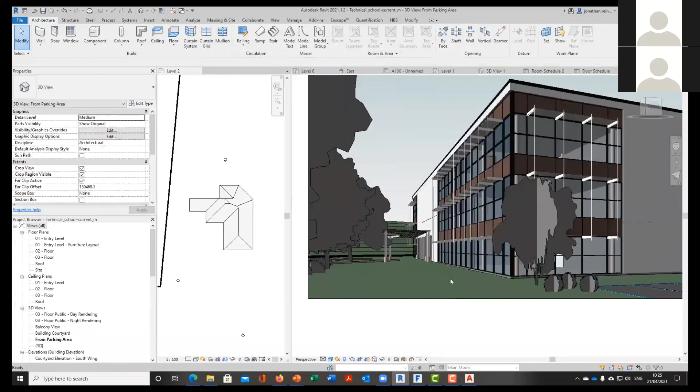So I like to open this one, and you can actually go into these projects and start to look at how they're actually modeled, and look at them in more detail - such as the type of materials they've used, turning on shadows, the different types of materials used on the facade, on the particular curtain panels, and these structural steel elements as well.

You can even copy those into your own project and start to reuse them from your own project as well. So that's getting started with Revit.

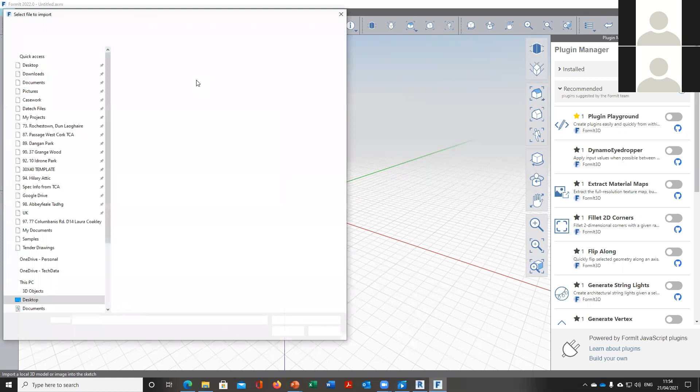But you can do it both ways as well, so you can import a Revit model into FormIt, yes. If I go to import, down here, you can take it in, it will bring it in as a 3D type, so an OBJ file, or it will convert to a DWG file. It won't directly take in an RVT file, but it does take it in as an OBJ or an AXM file.

So AXM is the common format for a FormIt file, or FBX as well. It also takes in SketchUp files, just to keep that in mind. If you're using SketchUp on your projects, that also works with FormIt, and you can actually bring SketchUp files into Revit as well.

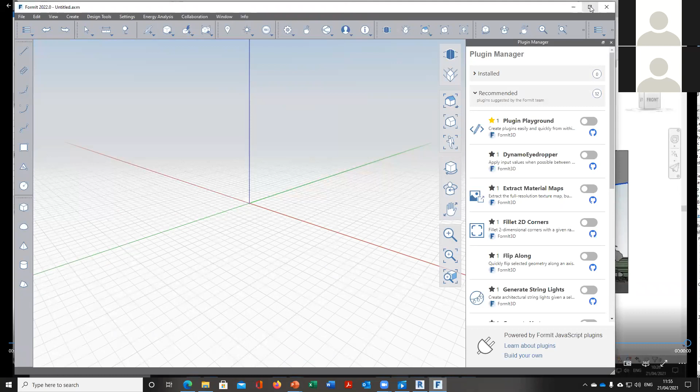Something else I usually demonstrate in FormIt, and I didn't have a chance to show it today - I think this is one of the coolest things about FormIt. I showed it at one of the CETA presentations the other day. If you use FormIt Pro, here we have FormIt Pro, and if you have a colleague based in Ireland or in a separate office - most people probably work in separate locations at the moment - you can collaborate together on the same model in real time, and I'll show you very quickly.

There's no more questions coming in, so I can show this. Whatever I model in here, I can share with my colleagues, and they can see live updates. So I'm just going to extrude this.

I'm just going to model a very basic shape. I can change my top view - sorry, just changing my units. What I'm going to do is model a basic shape in here, then extrude that up. So, basic shape, extruded up, but I want to share this with a colleague.

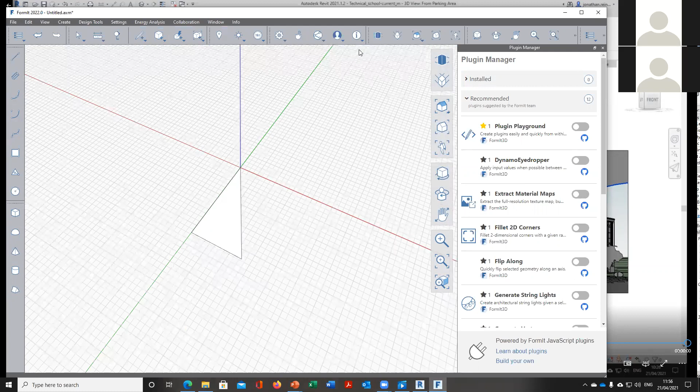Just go to share, start collaboration session. I can start a session. If I hit start session, I copy this link to a clipboard, then I can email it to a colleague. That colleague will then receive that link and paste it into their web browser.

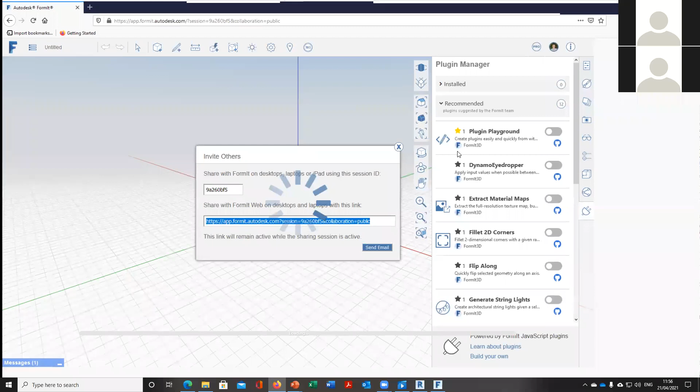Keep in mind that this is two separate locations - could be separate parts of the world, separate parts of your county, Ireland, or wherever. So the other person has received that link and is now logging into that model. I just happen to be the same person here, but keep in mind this is two separate people. They're logging in and can see everything that I see. I don't want to confuse people, but this is essentially two separate people working in the same model here in FormIt.

So person B can now come into this model and start actually modeling in here as well - placing down different objects, extruding - and you can see the screen on the left updating as well. This is all happening in real time, purely through an internet connection, and it works completely in real time. You could be doing this over a conference call, or messaging in the chat box through FormIt Pro.

Keep that in mind - it's extremely powerful for remote collaboration, which unfortunately some of us find ourselves doing a lot these days. Just being able to iterate, create massing, place even the site terrain in here and it will appear on the other side, and even import external objects if you want. FormIt Pro is extremely powerful for remote collaboration.